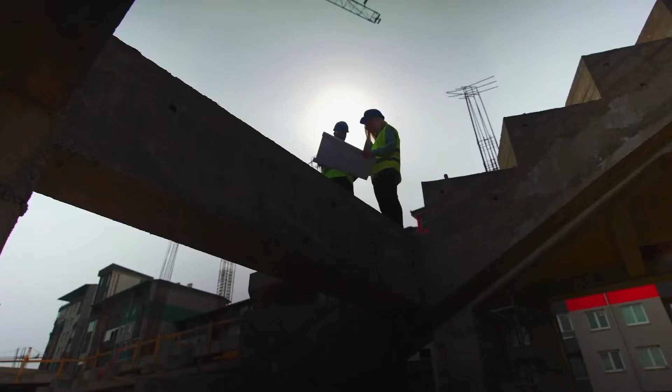Put simply, the way we build our towns and cities needs to change. The construction and operation of current buildings accounts for 40% of the world's energy consumption and approximately 1/3 of greenhouse gas emissions. But could one of the oldest building materials known to humankind form part of a modern solution for our buildings and cities of the future?

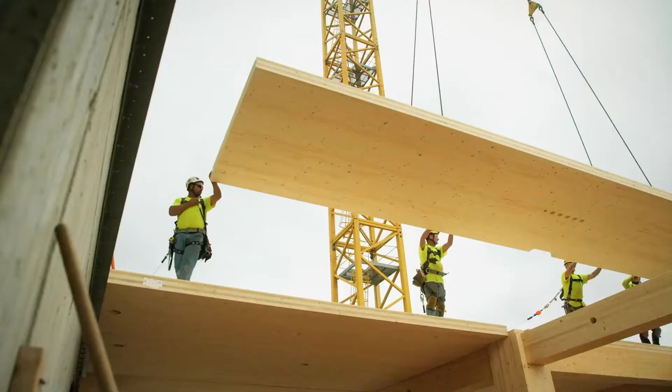Architect and historian Professor Maxwell Hutchinson has not only been designing buildings for half a century, he's also been involved in their conservation, some of which date back over 1,000 years. He's one of a growing number of people within the construction industry who believes that the huge carbon footprint associated with our current use of building materials, such as concrete, is unsustainable.

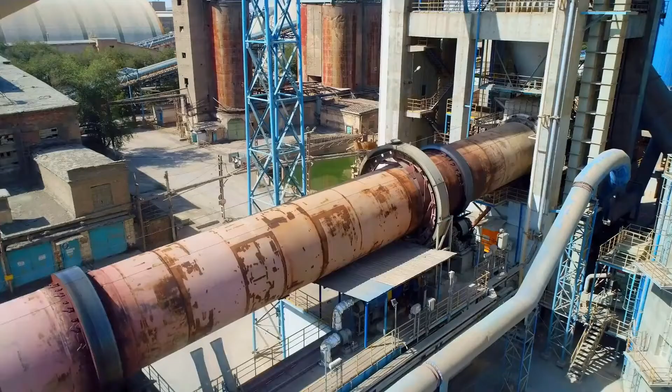There is general consensus that we need to change the materials we use in building all of our buildings. There's a huge amount of embodied energy, that is to say, the energy that goes into making the material, transporting the material, and putting it into position. And Portland cement, which is the principal ingredient of concrete, is incredibly energy intensive. It is estimated that annual cement production currently accounts for around 8% of global CO2 emissions.

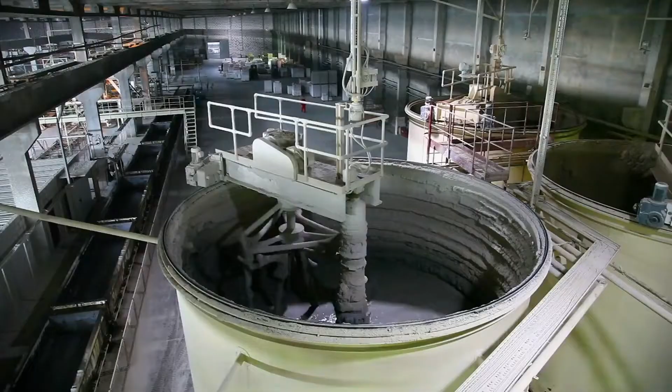And what the cement is mixed with to create concrete further compounds the ecological damage. Every year, the construction industry uses 50 billion tons of sand. That's enough sand to cover the United Kingdom. And the problem is that the world is running out of the right type of sand. The wind-worn granules found in deserts are far too smooth to bind together to form stable concrete.

So acute is the shortage that all over the world, riverbeds, beaches, forests, and estuaries are being stripped bare, often by organized criminal gangs operating on a vast scale, with lethal consequences for those who oppose them. But what if we could find a sustainable way of using an extraordinary building material, one that as part of its production process actually absorbs carbon? Well, the good news is, we can.

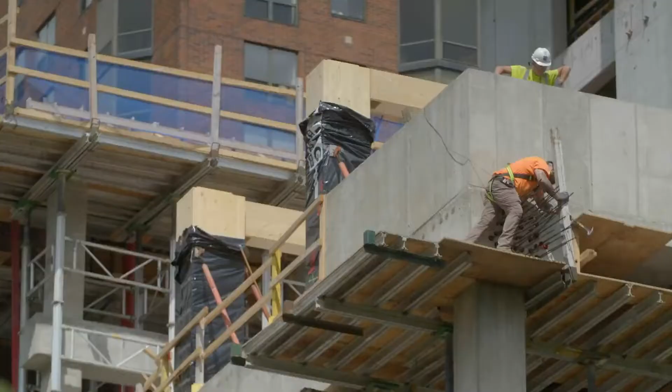In downtown Milwaukee, we might be seeing a glimpse of the future. Amongst much media attention, a groundbreaking ceremony is underway. Normally, this takes place before even a shovel breaks the earth. But this is no ordinary build. Although concrete foundations, parking floors, and lift shafts have been completed, for those involved in this project, it's all about what comes next. If it's not been apparent, literally words cannot describe the excitement I feel about being here today.

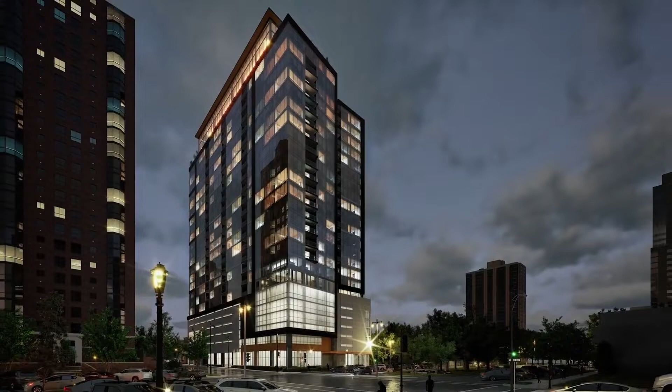Property developer Tim Gokhman never intended to make history. He just wanted to make a building that people wanted to live in. Standing 284 feet tall, its 25 stories will house 259 luxury apartments, a pool with retractable walls, even an outside cinema. When completed, it will be the tallest timber building in the world. And many believe it'll point the way for how we should be constructing our cities in the future.

Its name, Ascent. I remember a structural engineer, John Peranto, said this building would change the way that codes are written. John, I don't know where you are. I thought you were being dramatic. I was wrong. You probably heard the quote. I did say when we started this, if we get it built, it will change the code. It will.

To be able to create a building that will change the codes and rules that govern tall timber buildings here in Milwaukee has required the support and cooperation of some of the finest engineering talent from around the world. The city planning authorities, the fire department, even the U.S. Forest Service. You know, it seems like when you're doing something really special and you believe in it, things just come together.

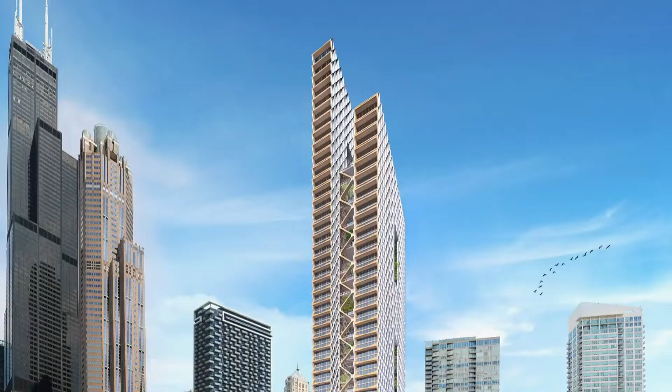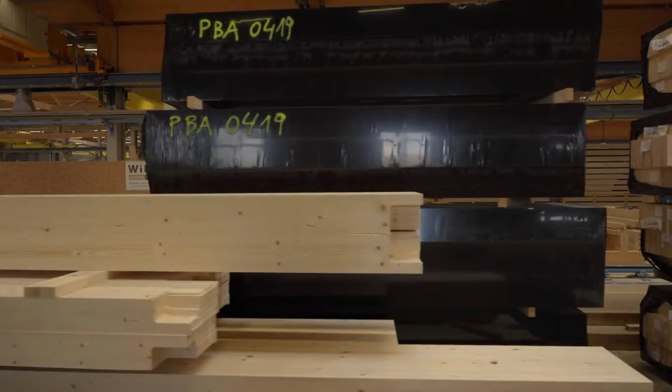What inspired Tim Gokhman was seeing a project for an 80-story concept design by architects Perkins and Will, Cambridge University, and engineers Thornton Tomasetti. These projects that we do internally in the industry, these are really what spur innovation. And the aim of this particular project was to see how far you could push the boundaries of timber construction with the innovative use of prefabricated components. They include glue-laminated timber beams, known as glulam beams, and panels made from cross-laminated timber layers called CLT. Collectively, they are known in the industry as mass timber.

It seemed like something out of the future. It was unbelievable. Not just the fact that you could do this to such a height, but that all the wood was exposed inside. And I sent it to the rest of the development team, our architect, et cetera, and we asked the naive question of, can we build a high-rise out of timber? I think Jason's been waiting for years for a developer foolish enough to ask that question, so he was pretty excited. I would say a combination of excitement with a healthy dose of fear tacked on, because it had never been done. Excitement and nervousness.

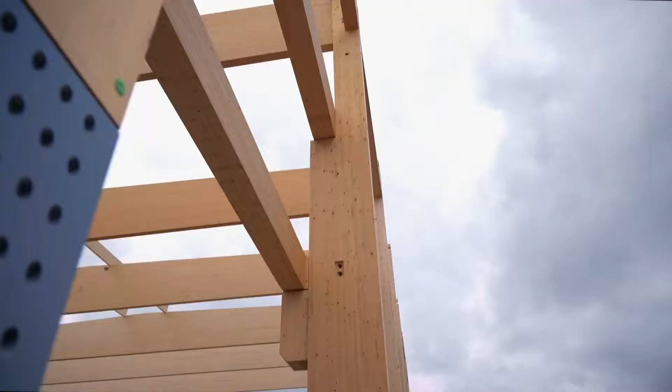I mean, it's one thing to do research projects, another thing then to actually bring it to reality. I would say River Beach was more of a research project than what you would call even a concept study for a project. But if it could be achieved, the potential benefits are huge. Some estimates suggest prefabricated mass timber construction is 25% faster than a traditional build, reduces construction traffic by up to 90%, and cuts the people required on site by 3/4.

It is such a pre-engineered system that is done to a detail level that is not typically done for both steel or concrete, leads it to be much more complex. The level of coordination that we were required to manage was like nothing we've ever seen before, because we digitally built this building down to the last screw. So it's been really, really eye-opening. And this is the way that buildings are going to be put together in the future.

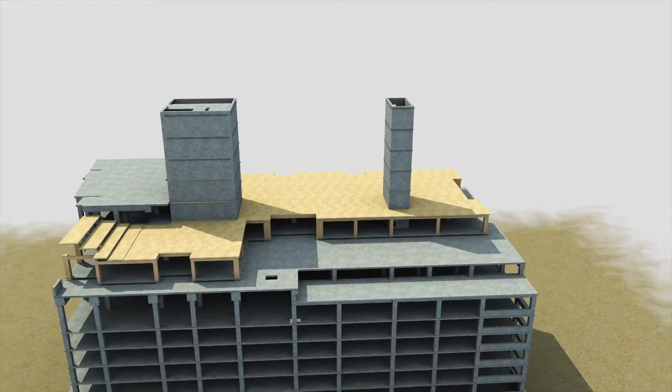Because of the concrete base and elevator shafts, Ascent is what is technically known as a hybrid, with timber making up 70% of the structure. Although high-rise hybrids have been built in Europe and Canada, this is the first time that anything even close to this has been attempted in the US. In general, the mass timber frame supports the weight of the floor. So basically everything you're standing on. In a wind-like condition where you have wind blowing on the building or you have, say, a seismic event, that is resisted by the concrete cores.

A really good example of the level of coordination that had to happen for this building to be built is driven by the fact that as the building goes up, the timber structure gets smaller and smaller because it's carrying less gravity load. However, the number of screws attaching the members stays the same. And so literally near the top of the building, we were running out of space in the wood for the screws to not clash with each other. And so the amount of coordination that it took to make sure that the connections were properly designed and free of conflict was hundreds and hundreds of man-hours by 3 or 4 different companies.

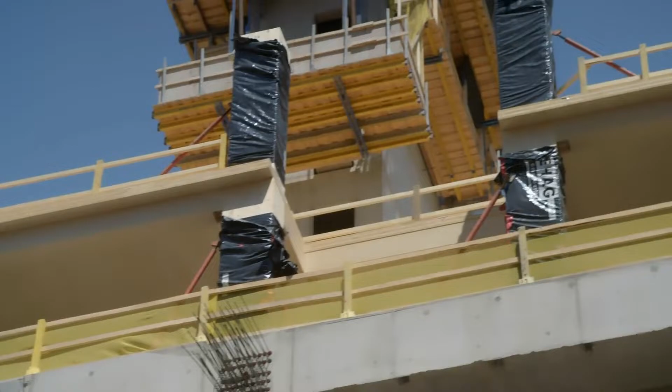There are a bunch of theories as to, is it going to build faster? Is it going to be as precise as you believe it's going to be in the models and as others are telling you it's going to be? Yes, it was all theory. Most developers wouldn't have the grit to really push on and do a project of this type. It's one thing to do something new, it's another thing to be the first. It's probably not something a rational person's going to take on. We didn't realize how challenging it was going to be, and I think you need that for innovation.

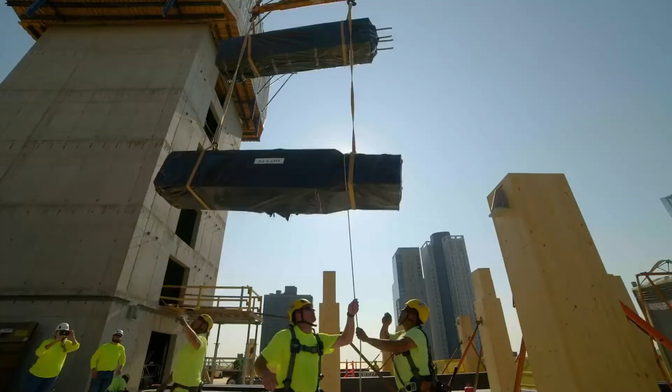Designing such an imposing wooden structure is one thing, but to bring the designs to life, you need to find people who can build it. But who do you need? The materials obviously point to carpenters. However, the building's size and structure requires the expertise of ironworkers, who became synonymous with the skyscraper in the first part of the 20th century. For contractor C.D. Smith, putting this team together meant consulting with workers and unions to create a new way for these established trades to combine their skill sets.

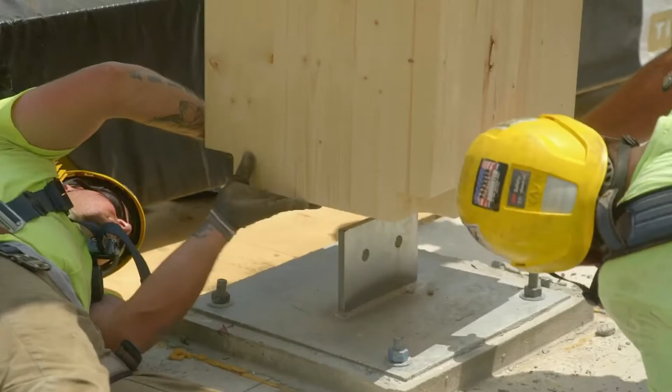It doesn't matter if you're a carpenter, iron worker, or an office guy like I am. We all can have our opinions and thoughts, and maybe it's the right move, maybe it's not, but everyone does a good job of communicating, and everyone wants to get to that finish line as quick, as safe, and as cost-effective as possible. They call it a joint venture. So basically, everybody does a little bit of everything, regardless of what union you're part of.

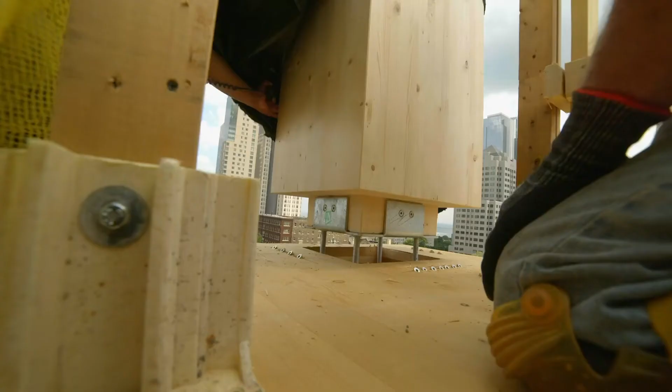There's a lot of first times, a lot of people coming, introducing different ideas and different methods that we're going to adapt on the fly. That beautiful wording. Normally we set up a rebar and a pan and you pour a column and then you build a deck and you pour a deck. It's like concrete's like making cake. Wood's completely different than concrete.

This is pretty neat. If all goes according to plan, one of the benefits of this prefabricated design will be the speed of its construction and the fact that it will require an assembly team of just 12 skilled workers. However, the complexity of the challenge should not be underestimated. All very different from pouring concrete into molds. Even the most experienced of contractors could be forgiven for feeling a little daunted by the sheer scale of the kit of parts they are going to be working with.

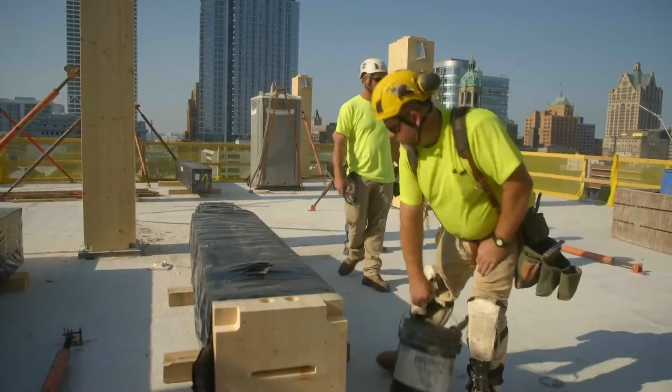Some are glued, some are straddled, it's wood on wood, some have a knife plate and there's bolts that go through the timber. And then you see the screw detail. There's a million screws and fasteners that hold the whole picture together. It's a big jigsaw puzzle. And it's a jigsaw puzzle that requires the utmost precision.

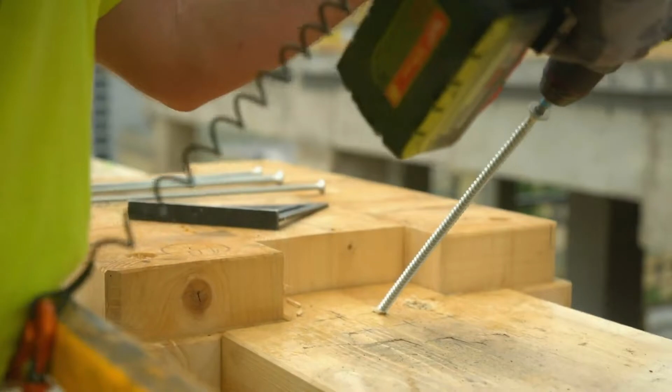Certain columns, in one face, there'll be 16 16-inch screws that hold it, and trying to fit them all in within the spec. Each screw has to be within 1.25 inches of each other, and then not hitting another screw as you're driving in. Every screw has to go in at the perfect angle to make sure that the screw thread is in contact with the right layer of laminated timber, making up the beams and slabs. Yeah, I'm learning every day.

And when it comes to positioning some of the columns, which require quick-setting epoxy resin glue, there is an added pressure of time before it sets. And then when I say ready, it's rocket time. You got 8 minutes to set it. And then you got to plumb it before the glue hardens too. Every column has to be precisely vertical to fit with the floors that will follow. You could set like 12 a day. We want to get faster than that. We want to do 24 a day.

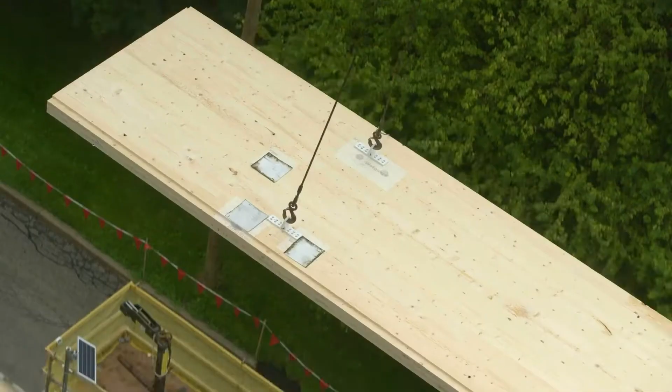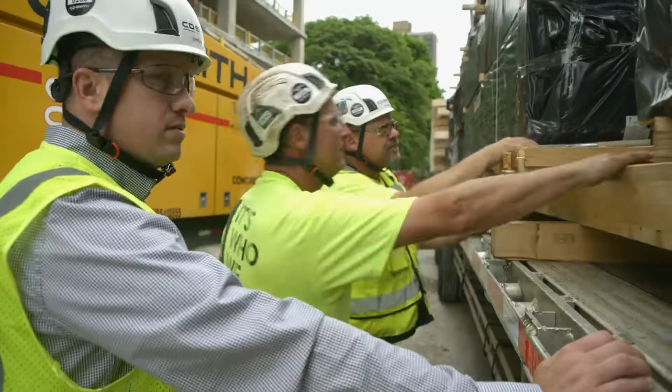For a building that has so many prefabricated elements, good transportation is going to be crucial. But project manager Chris Johansson is keenly aware this is one area that could easily wreak havoc with their tight schedule. There's a lot of concern with the global shipping industry. With COVID, there's labor shortages at ports, there's labor shortages at rail yards. All of that combined into us just starting delivery of over 400 containers. And then there's the weather. Yeah, it's going to be coming very shortly.

If timber skyscrapers are to become a familiar part of our cities, there is one key attribute in particular that is essential they possess: endurance. For anyone who doubts the longevity and durability of timber, look around me. 1060 and the timber's still here.

This is St. Andrew's Church in Greensted, in the county of Essex in southern England. The oldest timber building in Europe. Like many churches, it has evolved and been added to over the centuries, but its thick timber walls date back over 1,000 years to a time when England was still ruled by Saxon kings.

The structure and shape and form of timber buildings was determined by the trees that were available to build the building. Engineers have to be able to calculate every part of a building. The challenge that we face is how to take this material and give it the uniformity and predictability that we need in our modern buildings.

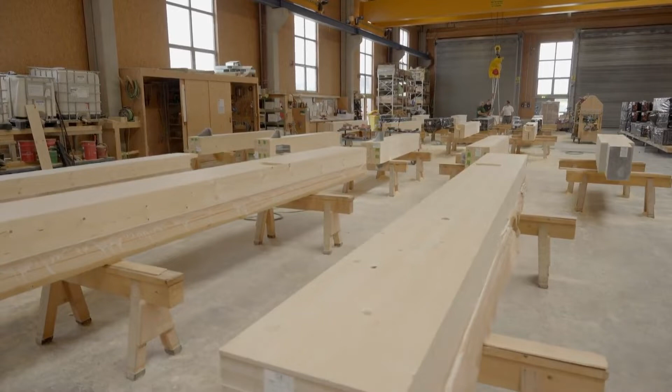The prefabricated timber structure needed to create Ascent is being produced in Austria. Almost half of the entire country is covered in forest, occupying an area the size of Switzerland. And with centuries of experience and an eye to the future, they are currently planting more trees than they harvest.

The slower a tree grows, the denser its ring pattern. The higher the density, the greater the strength. It's for this reason that timber from the Ascent project has been selected from forests at a higher altitude where the annual growth is slower. One company, KLH, is making the CLT panels, whilst another, Wiehag, is making the glulam beams and columns.

Founded by a local carpenter over 170 years ago, Wiehag has become one of the world's leaders in prefabricated timber structures. In their warehouse, timber destined for Ascent is stacked, ready to undergo a transformation that will enable it to meet the most stringent of criteria determined by the engineers.

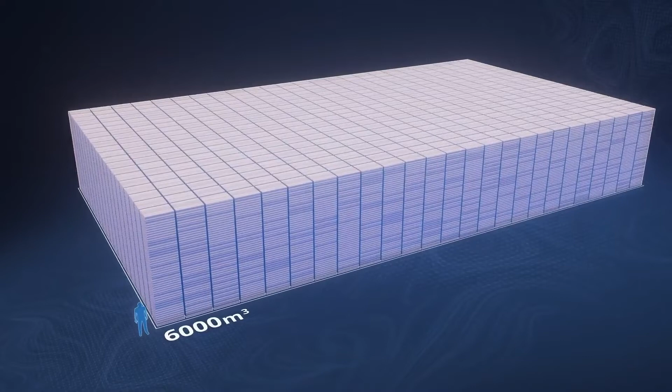Just to give you a picture, we produce for that building 2,300 cubic meters of glulam, but we have to pre-select 6,000 cubic meters of sawn timber. You see some of it in the background. From these 6,000 cubic meters, we selected only the best boards. We don't throw the others away, we just use it for other projects, for let's say normal projects. But the pre-selection process was an extra mile for the Ascent building, yeah, definitely.

Before the selection process begins in earnest, the sawn timber is kiln dried to reduce the moisture content down to around 10%. It then passes through a metal detector to ensure that there are no small pieces of metal that could damage the expensive and complex machinery.

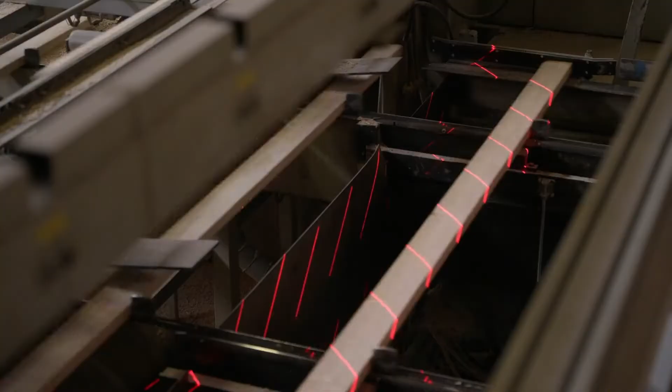Then there is a laser scan which checks how warped the timber is, because it might be a bit warped. And then we have an end grain camera to look at the annual growth ring, because we have to know if it's the right side or the left side of the board, and also how fast the timber has grown, so the thickness of the annual growth ring.

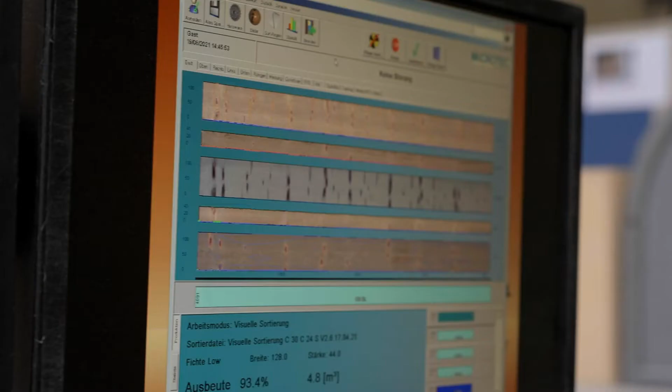The timber is then planed and analyzed by X-ray to assess the density and to look for any resin pockets or cracks. Once they pass selection, every individual piece of timber is given its own data file containing all the information gained from this analysis. These pieces are known as lamella, which comes from the Latin word often applied to armor, meaning thin plate.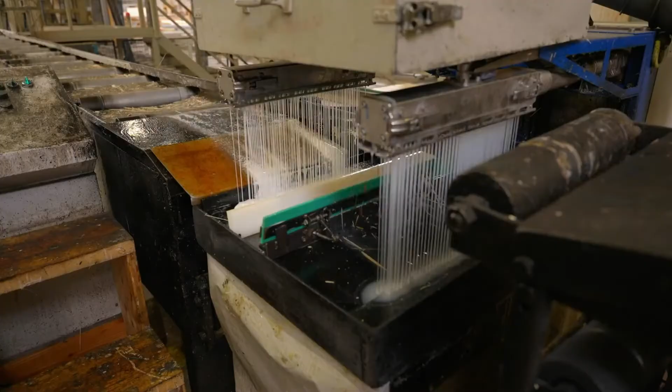The single lamella can be endless. I mean, obviously, our factory has somewhere a limit, and that limit is 50 meters. And this thin lamella of roughly 40 mil is very flexible, so you can bend it to the shape of your architecture. With the carefully selected lamella formed into the right lengths, they can now be glued and compressed together to make up the large beams and columns.

Once dried, these are precisely cut to size using a CNC machine. It's only with the advent of computer-aided design that this scale of prefabricated mass timber construction has become possible. Then you have, let's say, your perfect shape, and the last step is still a bit of manual work. After a few cosmetic finishing touches, the steel jointing elements are added.

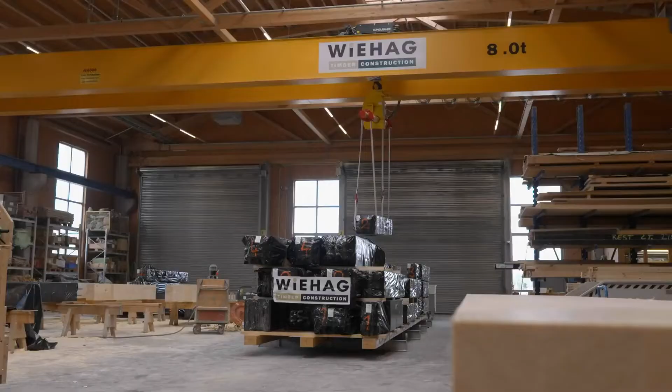Every detail is considered during the manufacturing process, right down to the loading of the shipping containers. The sequencing of loading is so complex, a special 3D load planning software is used. By loading the container, we also think already about the installation process. So what element do they require first? And therefore, we place the elements in the right order already in the container.

Having left the factory, the beams and columns begin a 7,000-mile journey by sea to Port Milwaukee on the shores of Lake Michigan. Here, they are stored until their contents are needed on site. And when they are, it's down to Jesse Miller to ensure that they make the final 4 miles of their journey safely and on time.

Every single load, I think we're somewhere around 90 now, has been hauled by me. And as long as I continue, I should deliver the whole wooden structure, the whole building. It's definitely a proud feeling. I'm proud to be involved in this project.

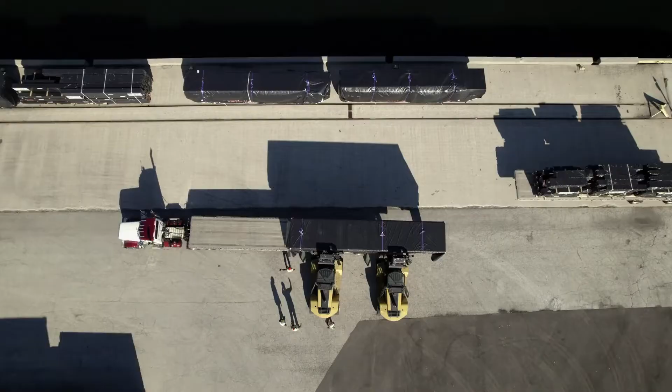You know, originally the plan was to have material at the Port of Milwaukee 2 to 3 to 4 weeks ahead of time, and then it would be ready for us. And with COVID, the Suez Canal, et cetera, those dates were getting extended out to where it was scheduling things down to the day. Load 91, here we go.

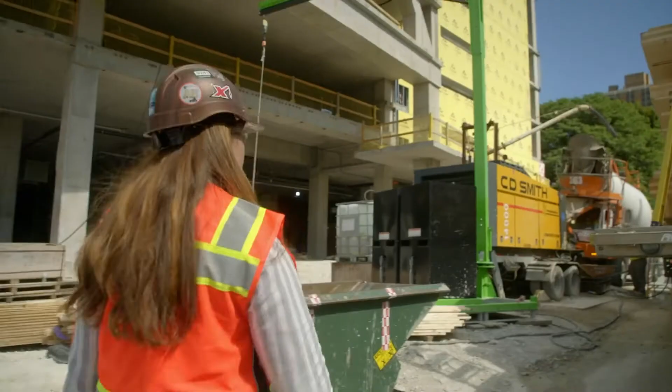Back on site and 11 weeks into the timber build, things are really starting to take shape. Well, you gotta look way up now. So that's a big difference. Handling the complexities of sourcing, procuring, and managing all the timber elements is Taylor Cabot and her team from Timber Lab, a mass timber design and construction company.

Can you imagine standing here in your living room, being surrounded by this wood? You know, it's gonna be a really rich, warm environment for people. Like, that view is just insane. This is why people pay the big bucks, right?

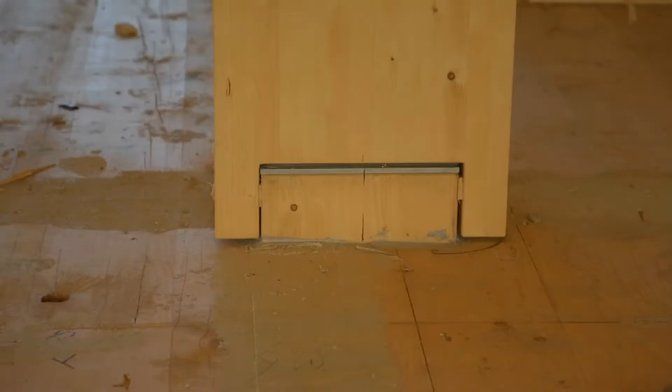There's absolutely no margin for error. We have 1,863 pieces, and they're all unique. If one of these fell off the side of the building, we wouldn't have a replacement for that piece. We would be asking for a new one to be made and sent to us. It's extremely critical that everybody is on board with understanding that these pieces are irreplaceable, and in some ways, you can't put a price tag on any of them. We've been extremely lucky, but I like to think that a lot of that is the hard work and dedication of everybody and having an amazing crew to put it together.

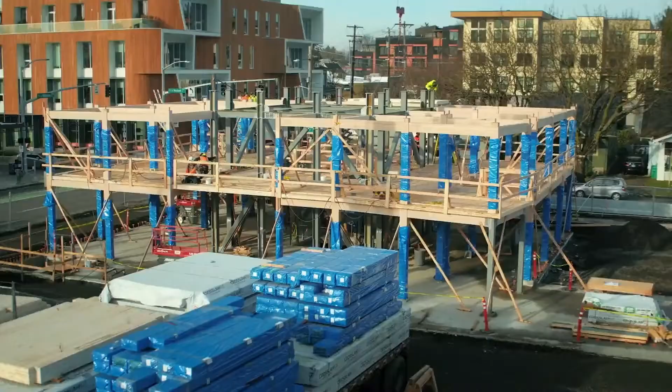Taylor is no stranger to record-breaking timber buildings, having worked on the iconic 8-story Carbon 12 building in Portland, Oregon. When it was completed in 2018, it was the tallest timber building in America, standing 85 feet tall. We were very proud of that, and we just beat it a couple days ago here on site. Feels good to actually surpass it. Somebody has to, so it might as well be me. We're blowing it out of the water, actually, which is pretty exciting as well, not to just eke it out with an extra floor.

We're looking at about 7 days a floor right now. On a really good week, they've been able to do it in 5. They set all the beams on one floor in 1 day. This is over a third faster than with a traditional build. There would be no way to do that in any other material. Such is the work rate that on average, one beam or column is lifted from the truck every 15 minutes.

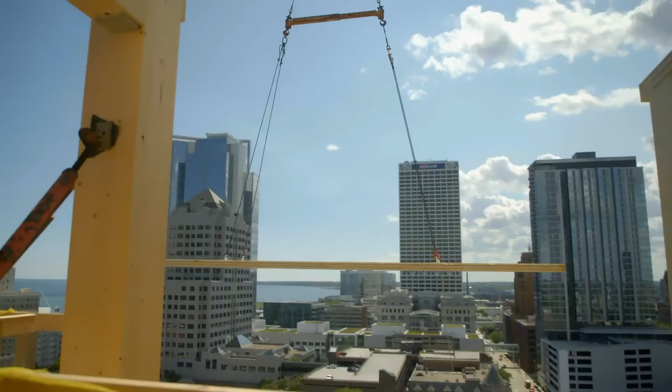And every single timber component has to be assembled with the utmost precision. Figuring out how to bring the pieces safely up to deck and set them to tolerances of 1/16 of an inch really requires an extremely thoughtful crew who understands that and has that skill set. The most impressive thing is you give a guy a random task that he's never done before, and how quickly they can figure out, oh, if I do this or that, I'm gonna do it exponentially faster. It took probably like 3 or 4 floors before we kind of got it down pat.

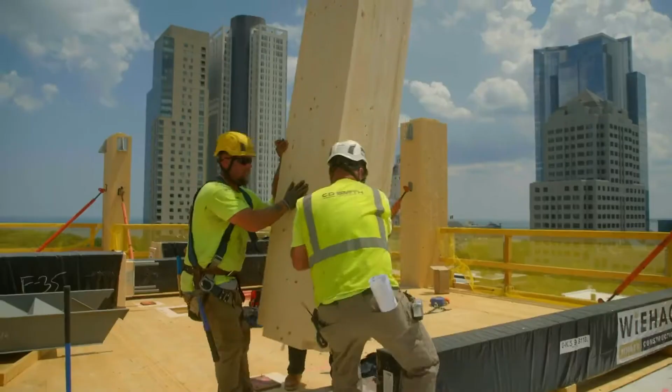What are we on, 16 now? 16th floor? As far as what we've learned on this project, I think it's gonna say a lot as far as what's gonna start happening in the future.

I come home clean, so that's a good thing. Wife likes that. Yeah, it's fun. Not like fishing, but it's fun.

We're here to make this project go, and I personally think we're knocking it out of the park.

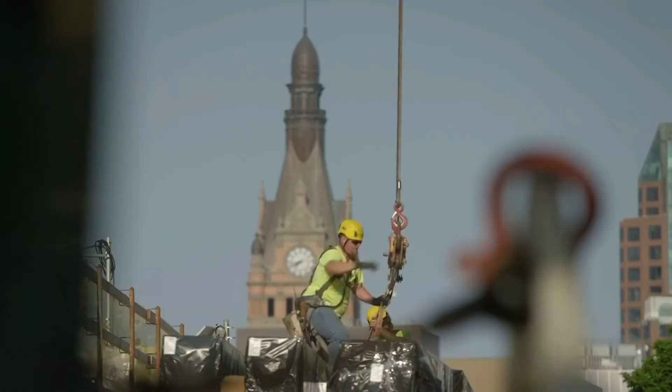As Ascent soars ever higher, it's interesting to note that Milwaukee is no stranger to record-breaking buildings. Just a few blocks away is the City Hall. When completed in 1895, it was the world's tallest building at 353 feet. In many ways, it's a mirror of its new neighbor. Its conventional structure, built around a steel frame, sits on wooden foundations made from over 2,500 white pine timber piles.

Yeah, it is ironic, the flip that you see right now with the use of mass timber on City Hall versus how we're using it on Ascent. But in some ways, you know, it's very similar. We pushed technology pretty heavy back then with City Hall, but we're also pushing technology pretty hard right now with the Ascent project.

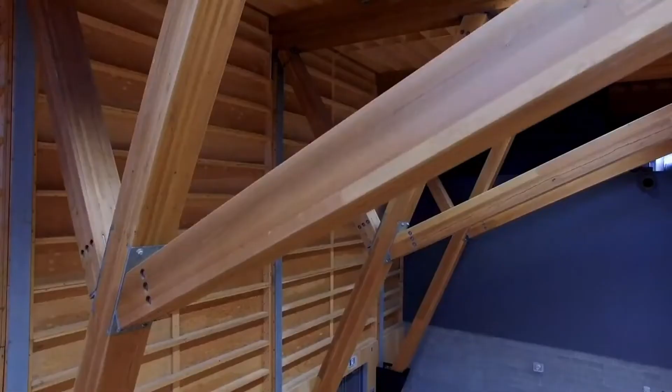Today, we're obsessed with high buildings. They define our cities, but span, the space between walls, is just as important. If mass timber is to be adopted on a much broader scale, it needs to be capable of supporting a wide range of structures essential to our 21st century infrastructure.

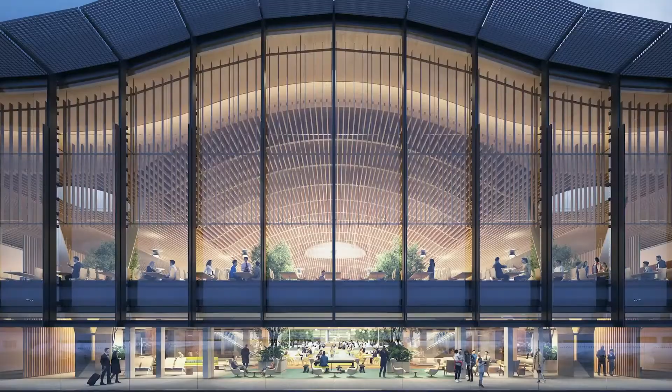At the same time as Ascent is being built, a huge mass timber roof is under construction as part of the ongoing renovation at Portland International Airport. For those involved in the design of passenger terminals, there is a sense that perhaps the wheel has turned full circle.

When King's Cross Railway Station in London was built in 1852, they used a laminated timber roof. It was 105 foot wide and 71 foot high. It was one of the engineering marvels of its time. No roof like that had ever been built before.

But there was a problem because of the steam trains underneath this remarkable roof. The water vapor attacked the laminations in the timber, so it had to go. The material chosen to replace it at the end of the 19th century was wrought iron, which had revolutionized the world of engineering, but would soon itself be usurped by steel. If laminated timber was to have a future, it needed to change.

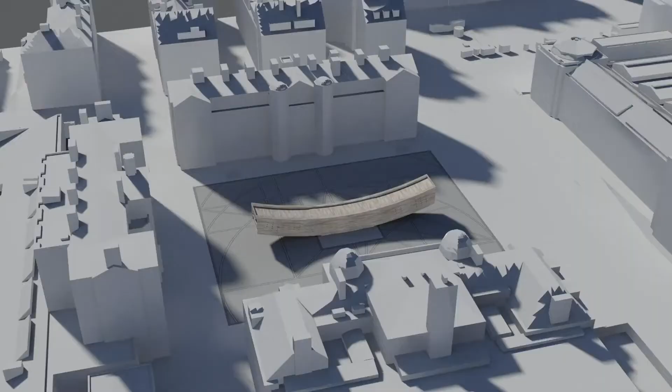Andrew Lawrence is a structural engineer and timber specialist at Arup, a company which is renowned for its pioneering work in the world of engineering and construction. The game changer is having a really good glue. It wants to be strong, but also it wants to be waterproof. And those waterproof glues were not invented until the 1930s. So right until then, we could laminate structures by taking small planks of wood and stacking them side by side or above each other.

At King's Cross Station, they're stacked horizontally, but they're not joined together. So it's like all the leaves of a book. They can all slide over each other when you bend the book. But if you glue those planks together with a really good, strong, waterproof glue, those leaves of a book become like a thick sheet of cardboard. So that's what those glues give us. We can essentially make much larger members.

So if we had the ability to create new, more resilient timber beams 90 years ago, why haven't we seen buildings like Ascent before? One of the really exciting new developments is what we call CLT. It actually stands for cross-laminated timber. And the explanation of it is in the name. Wood is fibrous, and it only has strength in one direction. And so we take those planks, those fibers, and we lay those fibers in one direction. And then in the next layer, we lay the fibers at 90 degrees to that, and the same again and again. So we've made ourselves this cross-laminated timber panel, which has strength in two directions.

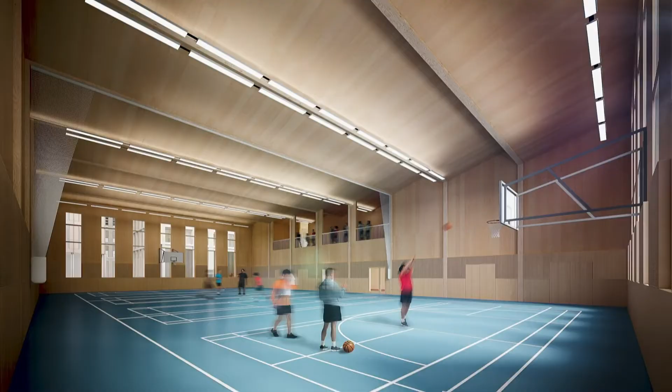So first of all, a quarter of the weight means that you've got at least 4 or 5 times less truck deliveries to site. Secondly, it means that we can save on the cost of foundations. And also because the wood is lighter, perhaps we want to build over a railway tunnel or something like this. Quite a lot of wooden buildings have been built in locations where we couldn't have really built in other materials, or we couldn't have built such tall buildings in other materials because they'd have been heavier. And of course the extension of that is that if we want to add perhaps 1 or 2 stories onto a building, then wood can often be a lightweight way of doing that.

One of the biggest hurdles Ascent has had to overcome isn't one of engineering, but of perception. Could a tall building really be safe if there was a fire? And there is one fire in particular that occurred long before there were proper building codes to govern construction that has become synonymous with timber buildings.

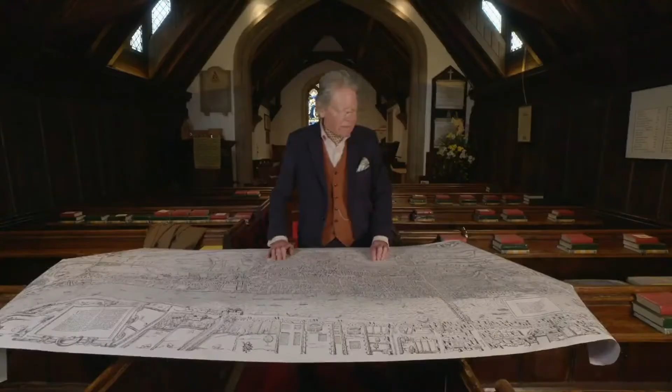The Great Fire of London of 1666 that started in a baker's shop in Pudding Lane spread throughout these timber buildings as far as the River Fleet. After the flames of the fire had subsided, to walk through the streets of London would have been utterly remarkable, because all the belongings of people had gone, the thatch on the roof had gone, but the timber frames survived the flames.

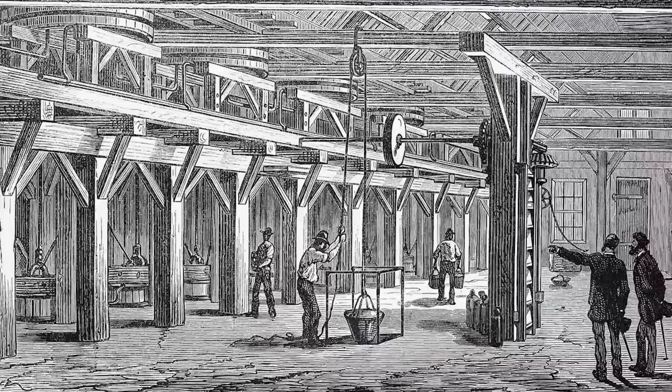This ability of large timber members to withstand fire is something that would later be proved on numerous occasions in the large factories and warehouses of the 19th century. And it's quite interesting that some of the code work and the code information we still have today is actually based on dimensions and sizes which came out of engineers looking at those fires.

Because of their extensive experience in this field, David Barber and the team at Arup were appointed as fire engineers for Ascent. One of the challenges they faced was that the existing building codes for tall buildings in Milwaukee were based on traditional steel and concrete construction methods. To make the case for timber construction, it was essential to work closely with those we turn to should the worst happen. Often some of the really clever ideas we get to how we can solve some issues come from fire departments and the experience they have.

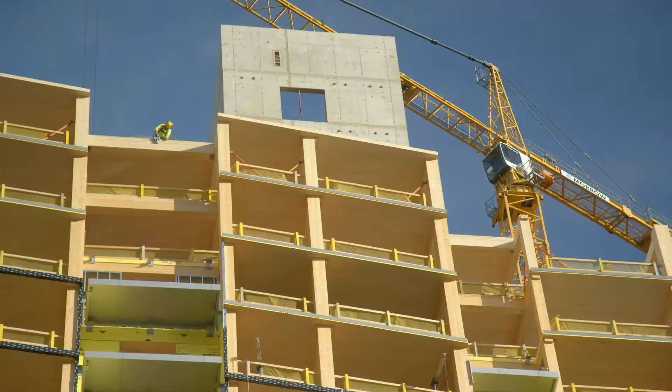We had a fantastic fire department who were enthusiastic about it, understood what was going on. So we want to have them involved, especially where it is quite innovative and quite different. I was very pleased to be a part of it. It's great to have the world's tallest mass timber building in the state of Wisconsin, and more specifically Milwaukee in general. I think it's a big win for the city, and I think buildings of cross-laminated timber, mass timber, are going to change skylines in big cities forever.

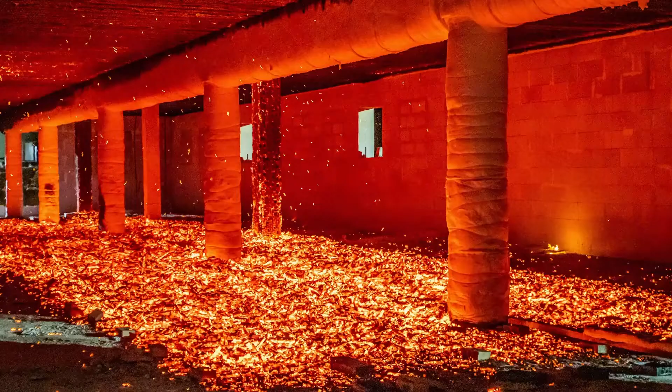With a fire, what's inside a building is every bit as important as the material used for its construction. The majority of your heat is going to come from the contents inside the apartment. You know, we look at our consumables and our furniture. Arup had already been independently conducting some groundbreaking research into how mass timber buildings react to internal fires. We've been doing some large tests on very large compartments with exposed cross-laminated timber. We've been carrying those out in France, and as part of that, the process has been to work out how do fires react and change in larger compartments and larger spaces.

The tests have been able to help quantify to what extent exposed timber in a modern building will feed a fire once it's started. In the same way that we engineer for earthquakes and tornadoes and high winds and high snow loads and all those sort of things, as long as we know about it, we can then safely engineer for it. So it's a matter of understanding what the issue is, understanding what the data is, the sort of loads, and the way that the structure is going to be impacted, and then work out what are the mechanisms and levers that we have to pull to be able to design the structure to withstand that type of fire and that type of fire development.

Whilst the research has been invaluable, it was still not enough to instigate a change in building codes. Because of the unprecedented height of Ascent, it would need to prove that in the event of a fire, it would have the same structural integrity as a conventional skyscraper. So we were absolutely looking at something which was sort of breakthrough. And to achieve that breakthrough, the timber columns would need to withstand a fire for at least 3 hours, which is more than 50% longer than previous comparable tests. The facilities and expertise needed to conduct them were to be found courtesy of the U.S. Forest Service at the world-renowned Forest Products Laboratory in Madison, Wisconsin.

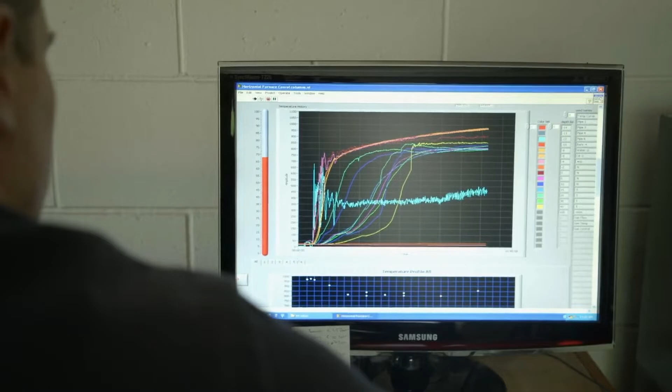We've instrumented the glulam column with thermocouples that allow us to monitor the temperature throughout the glulam as it's exposed to the fire. And it's well understood that char of wood forms around 300 degrees Celsius, so we can monitor that 300 degrees C isotherm through the depth of the column. And then by doing that, it enables us to calculate char rates. Within 25 minutes, the temperature in the furnace will reach 1100 degrees Celsius. It's this surface charring that is key to timber's ability to withstand fire. It forms what is sometimes referred to as a sacrificial layer, which acts as a barrier to further combustion.

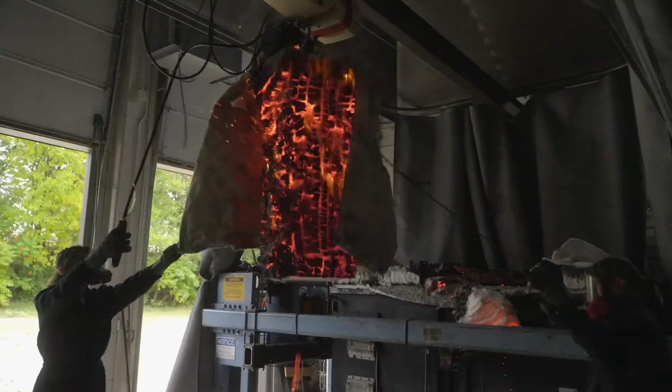Once we obtain char rates from the glulam column, then structural designers can use those char rates to appropriately design the size of their glulam beams and columns within a building. It's incredibly exciting to be on the forefront of all of this and to watch these structures going up very close by to us. It's a really exciting time to be a part of this type of research.

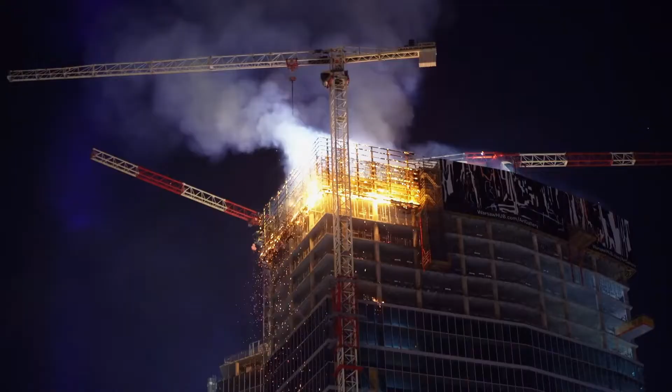In contrast, steel behaves in a very different way when heated to similar temperatures, which is of particular concern in an emergency. In the case of a steel building, when that fireproofing falls off, the beam is allowed to be heated. We all know what happens to metal.

When it heats up, it expands, and a 100-foot column steel I-beam will elongate approximately 9 inches at 1100 degrees Fahrenheit. Now, that might not seem like a lot, but imagine that 9 inches pushing out against the walls, right? So that's 9 or 18 inches on both sides, and that's going to cause significant stress and a lot of the catastrophic collapses like we've seen on these types of buildings.

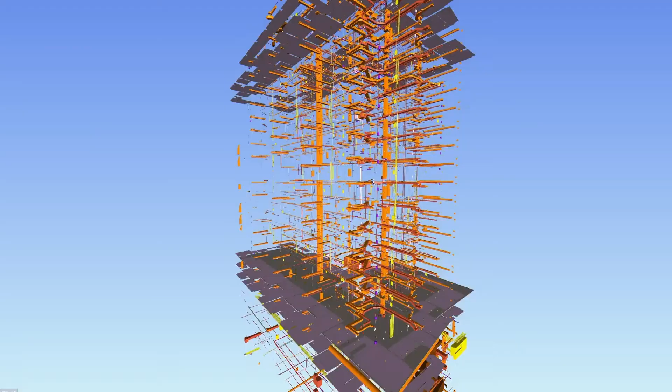What has reassured firefighters is that laminated timber behaves in a very similar way to those solid timber frames of centuries past. And although badly charred, it still retains its structural integrity. It's worth remembering that in modern buildings, sprinkler systems would do their job long before the need to depend on sacrificial charring. But 21st century construction codes are all about engineering for the worst-case scenarios.

We're looking at the structure in these fires, assuming that the sprinklers haven't worked, and these have reliabilities of 95, 96, 97%, so they're incredibly reliable fire safety measures. But we also start to look at, what if the fire department is delayed, they can't get to the building, so we kind of rule them out as well. So we're looking at very, very low likelihood fires and looking at the worst case situation for those.

And then we have to work out, so what other mechanisms and levels of safety do we have to put in place? In addition to sprinkler systems, we have automatic fire detection systems which sound alarms and which allow floors where the fire is closest to be evacuated first. We have certain systems which protect stairs with pressurized air and they keep the smoke out, and often they're within corridors as well so that people can leave their units within a smoke-free environment.

And then also we have lobbies for people who can't walk downstairs, and we have protected spaces which allow people with disability to be able to wait safely for the fire department to come and take them away. And often people have no idea that those systems are actually there.

They hear fire alarms and they maybe have an idea that there's a sprinkler in the building, but often there can be a multitude of other firefighting systems of water supplies and tanks and pumps and all sorts of other systems which are in place and backup power supplies to make those systems incredibly reliable so when they are needed that they do work. And that's the most important thing. And modern high-rise buildings have those fire safety measures.

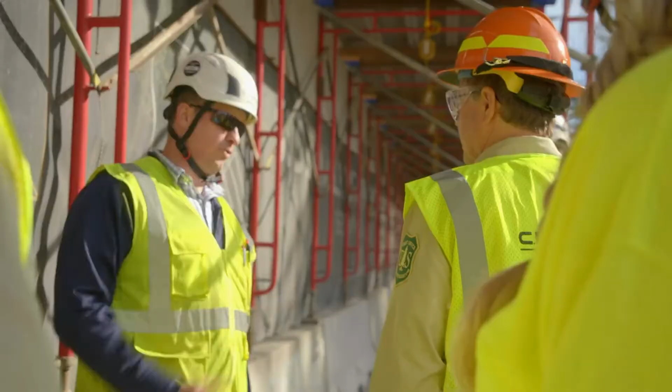In the case of Ascent, a proposal came in to evaluate and provide early stage engineering and technical assistance advice as they were planning this project. And I think even today, I just get really excited as I saw this building going up, the ability to walk through it, the ability to put out and touch, right? I mean, typically you don't think about touching a concrete column or hugging a concrete column. And certainly a place I'd love to live someday.

You want to hug it? I know you do. All right, good.

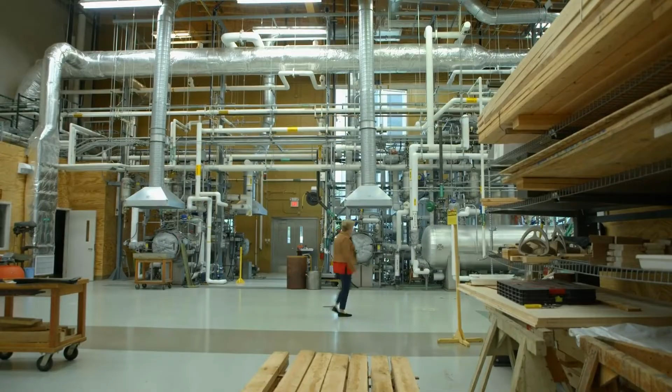Anything that can be made from wood, we can figure out how to do it here. We know how to use 100% of that tree. We don't have to waste anything. We have the technology to do it right now, today. And that's really important for people to understand. We can utilize the materials that come from the forest and regenerate more forests behind that. So as you take a tree, you grow a tree, or 2 or 3.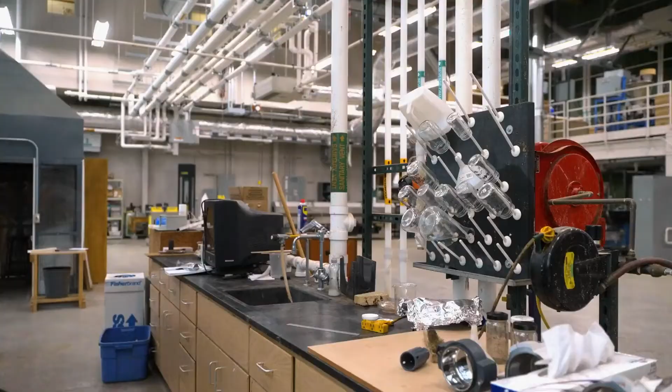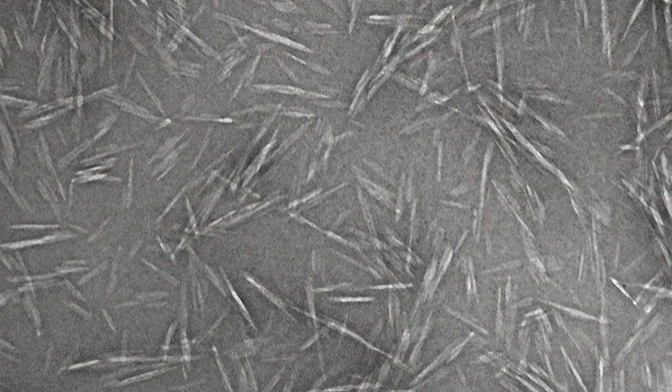One area of research that the laboratory has been conducting, which could have huge benefits for the construction industry, is in the field of nanocellulose technology. Well, cellulose is a major component of wood. And so we're taking this component down to its smallest scale. And at its smallest scale, it has remarkable properties. It's lightweight, stiffer than Kevlar, and has a tensile strength 8 times that of steel. And when it's used in concrete, the crystals enable the cement to bind differently, making it much stronger.

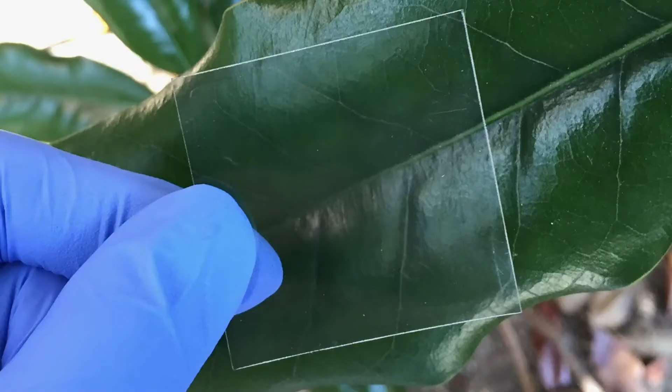The amazing thing about this material is you can reduce the amount of cement needed to have structural performance by about 20%. And so we're testing that now out on a bridge out in California. It also has the potential to form a basis of a much lighter and stronger alternative to glass, which is not only 2/3 more thermally efficient than glass, but also has structural properties. We're still working out some of the features of this to get it to be completely transparent, but we're 90% there.

And because nanocellulose has the ability to conduct electricity, if a combination of chemically treated and untreated fibers are incorporated into flooring, when they come into contact through compression, they produce electricity, which means that floors in places like busy hallways could produce significant amounts of energy.

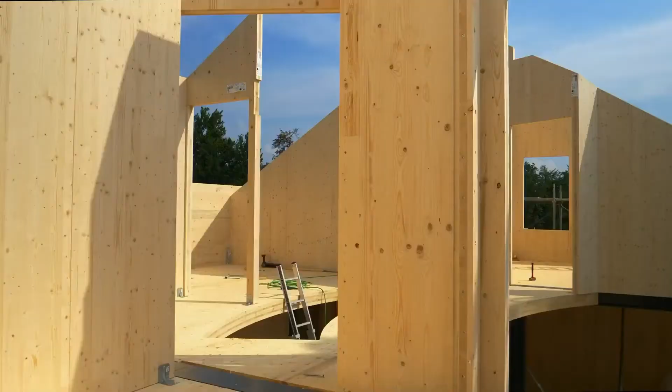So we can build a building, the structural components from wood. We can put flooring down that's wood, even ceilings. And now the windows, and have that produced from a wood product. And what if we could then take another byproduct from a wood process, such as in pulp and paper making, the lignin, and we can produce an insulating foam. Now we've increased the carbon storage in that building considerably.

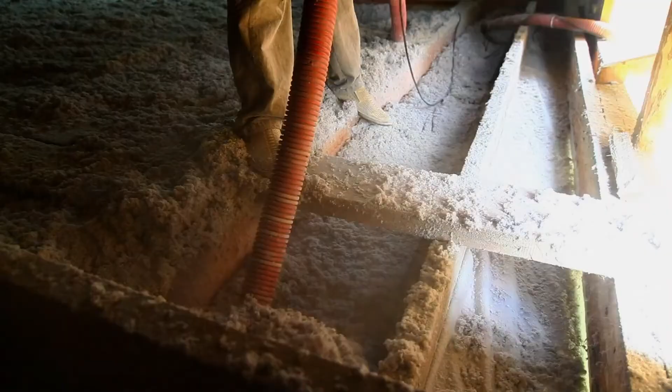A plant-based organic building whose component parts can biodegrade easily and go back into the soil to benefit the soil as organic material, or it can be dissolved in sunlight and seawater. Then we would have a truly sustainable system.

As timber construction enjoys a growing renaissance, just what heights could a timber building reach? So, if we're making a building entirely out of wood, then the optimum height is about 10 stories. If we get above that sort of height, we're going to struggle to make it strong enough to resist wind loading. The walls and columns supporting that building are really going to start to get quite big. So it's above about 10 stories that it makes sense to start to combine wood with other materials.

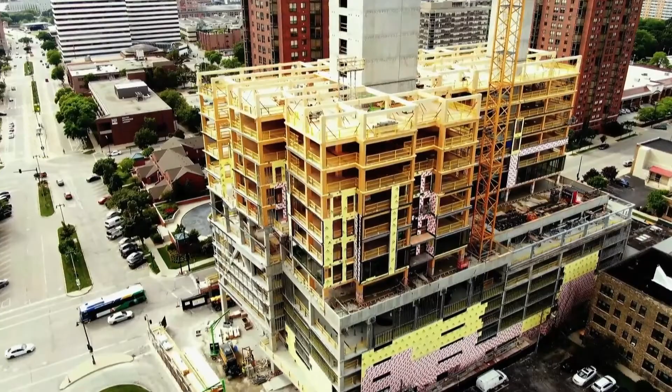Which is why Ascent, with its 25 stories, has adopted this hybrid approach. You're going to see hybrid systems with steel as well as concrete that really allow you to get the full aesthetic and almost biophilia of the space of exposed wood, yet use steel where it makes sense.

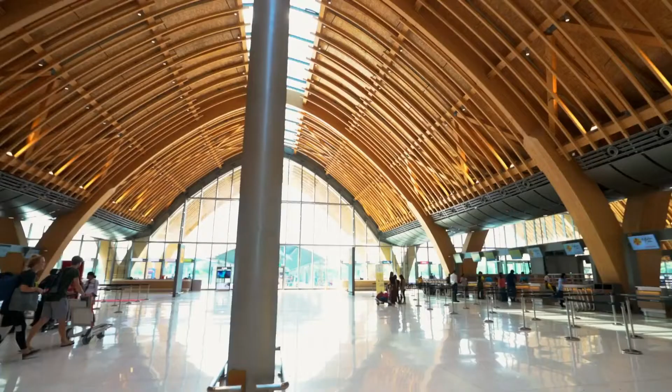Whilst it's unlikely that we will ever see a timber building as tall as one of John Peronto's other projects under construction, the 1-kilometer-high Jeddah Tower, it is at lower heights where the true potential of timber can be fully realized. We talk about the glamorous tall buildings, but the majority of what we build across the world is smaller buildings. And just imagine if the majority of those could be built out of wood. Imagine how much carbon dioxide could be locked away inside those buildings.

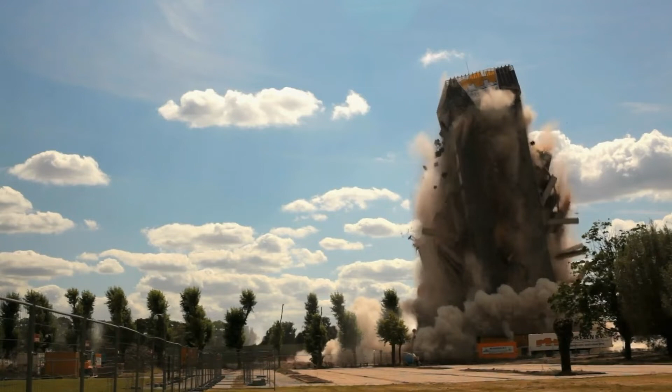The best thing we can do, whatever we build our buildings out of, is make them last as long as possible. From a sustainability point of view, there is nothing worse than demolishing a building. All that effort and energy that's gone into building the building is thrown away. Now, conventionally, we talk about 50-year design lives. I want to change that. I want us to talk about 100-year design lives, even 200-year design lives.

But obviously, there will come a point where that building has reached the end of its life. The next step is, can we reuse the components from that building in a new building? And the beauty of a prefabricated mass timber building is that it is far easier to dismantle and do just this.

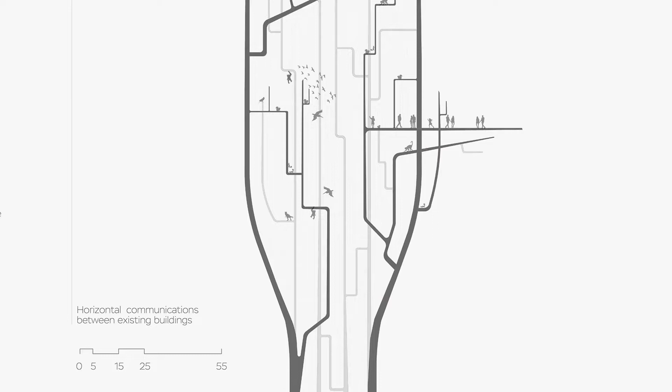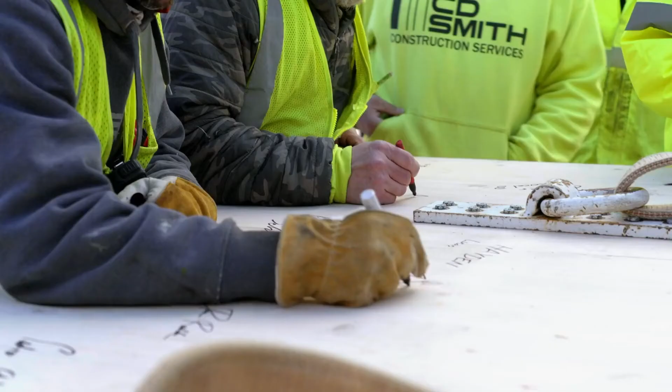Back in Milwaukee, the full 25-story height of Ascent has just been reached. It's known in the industry as topping out, and as is tradition, it's something to be celebrated. Just 6 months after the first timber was installed, and having shaved a third off the construction time for a traditional build, the final CLT slab is being signed by those involved in Ascent's construction.

Everything went great. That's about it. You guys have a good day.

Still feels a little bit surreal to be standing here and looking at that. This is proof that tall timber works, unequivocally, and that is going to truly contribute.

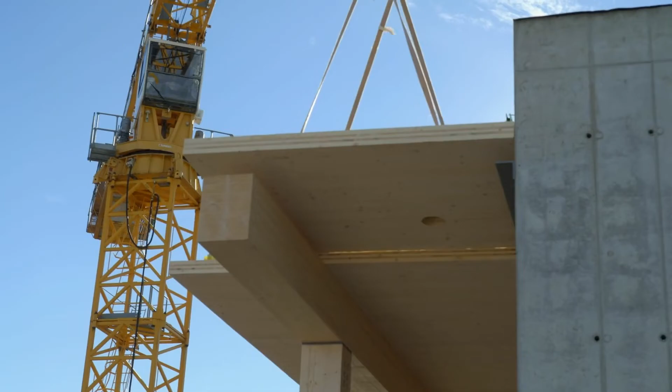Changing the way that buildings are designed and built. There are people not just in the United States, but throughout the world on social media sending their congratulations or discovering Ascent for the first time because so many people are sharing images of us topping out. The phone is ringing. People want to know how it got done. Can they do it? And so we're looking at timber projects in 3 or 4 other states right now. Our hope is to be doing these basically all over the country.

So when people look at Ascent, I hope they're inspired. I hope they can see that there's a way to build a more beautiful product in a more sustainable way. Would you do it again? In a heartbeat. We're doing it again right now. We're going to do it again, and hopefully we're going to do it multiple times.

On paper, at least in the city of Milwaukee, we could build a timber building up to 420 feet tall. A project like this out of mass timber will definitely help the industry move forward, and just because it hasn't been done before doesn't mean you can't. It feels like we're on top of the world. It really does. It's great to see timber reach these heights.